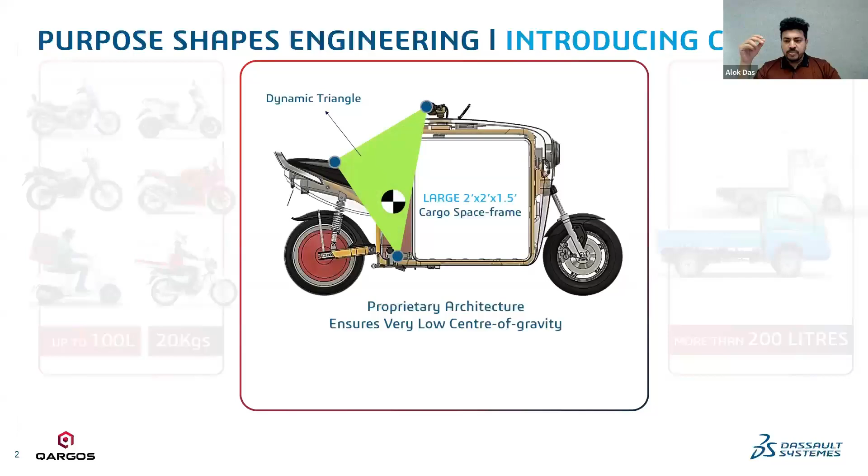At the same time, there are some commuter vehicles which are also being used for some form of logistics application. I'll not specifically talk about delivery application—delivery is just one part of it, but people use their vehicles for different forms of commercial application. They are good enough, but only for limited capacity, like 20 kgs, 100 liters of space. On the right side, we have vehicles like three-wheelers and four-wheelers.

But when we talk about a compact footprint product which can be used for multiple applications, that's exactly what we are working on—a compact logistics vehicle, a CLV which can do more for less. It's a proprietary architecture, ensuring a very low center of gravity, allowing a large space in a compact footprint. That's what we call a compact logistics vehicle, a cargo scooter platform.

We had to reimagine everything about how two-wheeler engineering has to be done with the load, so that the overall center of gravity of the vehicle is pretty low, keeping it much more stable, dynamically stable, and sorted as well. The key thing is that we have embedded 225 liters of cargo space and 120 kgs of payload, which does not include the rider.

It basically is only focused on the cargo segment. This particular journey has been amazing—there have been learnings during this process, challenges, you could also call it serendipity. We have discovered new things with this particular platform architecture that we have invented.

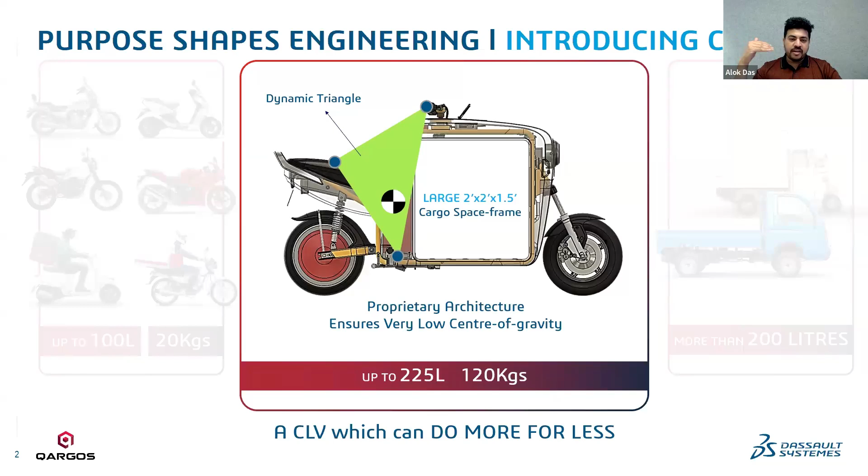So tell us a little bit more about the product, the vehicle itself. Yes, so when we started building the product, the idea was that a vehicle has to fit rightly between a two-wheeler and a three-wheeler. So we optimized, experimenting a lot about how much is good enough for a two-wheeler to carry. 225 liters of space was the most optimized volume that we discovered—it will not hamper the dynamics of the vehicle—and 120 kgs payload.

All these are physically tested and scientifically driven. It's not like a random number, 225 liters and 120 kgs of payload. It has got a low center of gravity because the cargo is actually located between the two wheels, not front loading. It has got a realistic range of 150 kilometers with the payload.

It is not a standard test condition. One key thing I must tell you is that when the vehicle is used for logistics application, it's going to go from point A to B, C, D, E, F, G, H and overall. So the utility of the vehicle, or the total cost of ownership, is driven by the number of kilometers you can do on any given day. That's how the ROI, return on investment, is going to reap.

At the same time, you cannot make a slow speed vehicle, because logistics is directly proportional to the speed of operations. If you make a low speed vehicle, it becomes a problematic thing. At the same time, these are the specs of the vehicle as well—you have to make a vehicle with 225 liters of space, 120 kgs payload, low center of gravity, 150 kilometer range, and it should be capable of going very fast.

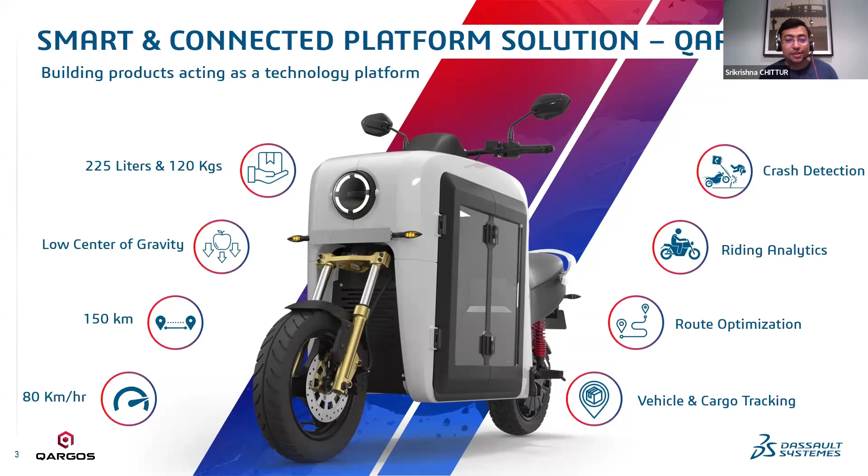And you always mention that it's not a single vehicle, it's rather a platform that is meant to do several things. Can you elaborate a little bit on the versatility of the platform?

So when we started building our solution, we built it as an empty space which can be optimized or customized for different requirements, like refrigerated compartments. This is a huge potential - about 150 liters of cold chain solution, for perishable goods like meat delivery or poultry delivery, perishable products, milk products, fish, or medicines. Those kinds of things can very well be used. This is a compact vehicle.

It's a business on wheels. A lot of small and micro enterprises might want to leverage this as a way to earn a living. It can be used for roadside assistance and parcel deliveries. So it basically goes to our imagination.

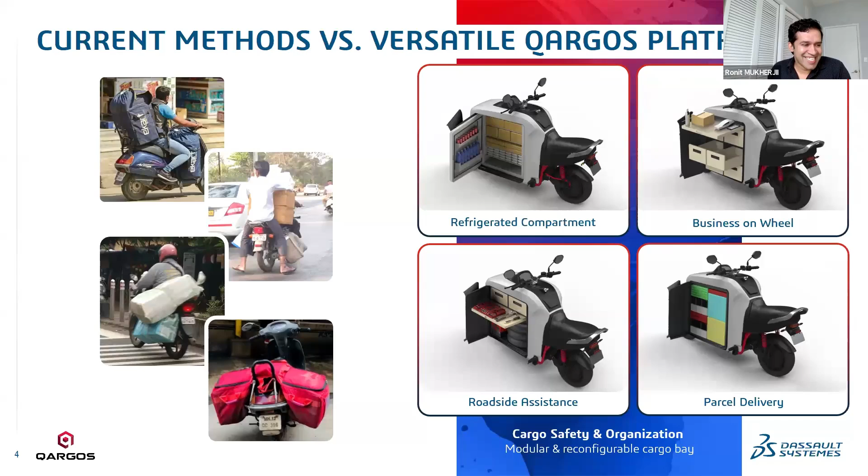It's funny we are talking about pets as a potential application. When Alok and Pranav met with Bernard Charles, the top boss of Dassault Systemes, the joke he cracked was, "This vehicle is so well designed, I would like to carry my grandkids in the cargo compartment because it also had glass, as long as it is ventilated, obviously."

And that's probably a perfect segue for us to quickly talk about the fact that the vehicle was launched at the Dassault flagship event, 3D Experience World 2024. How about that? That was awesome. On the left hand side, what you're seeing is our very own Bernard Charles exploring the vehicle. This vehicle was launched as part of a simulation domain session in Dallas.

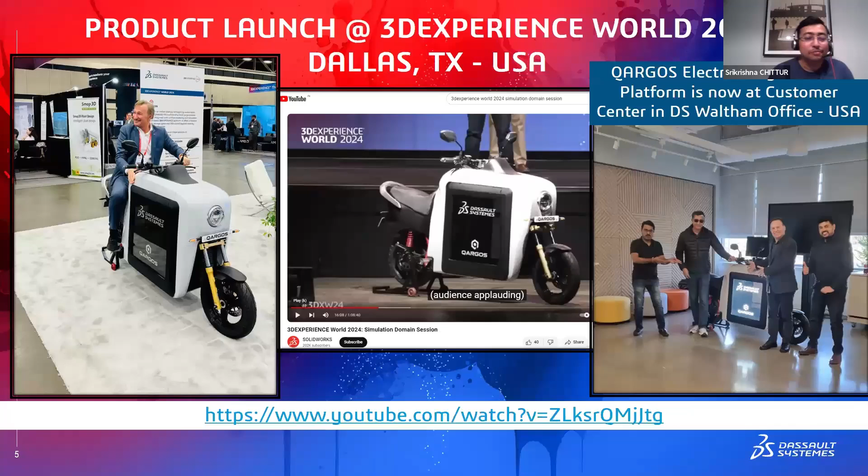It was a very exciting time because the vehicle was showcased all over. For those of you who don't know, right now this very first full version of Qargos, or first model of Qargos, is actually at our Waltham office in the customer center. On the right hand side, you see Manish and GP standing next to the vehicle, next to Alok and Pranav, who are there at the office.

Huge congratulations to you guys for being able to launch the vehicle at such a large scale, at an event like 3D Experience World. Fantastic work. Absolutely, Srikrishna and Ronit.

It has been actually a dream. A lot of times when I look at the photographs now, and I'm honestly telling about it, it looks like a dream, whether it really happened or not.

All thanks to the Dassault Systemes team. I still go back 5 years ago when we made the first sketch in SolidWorks, to this level where we have actually introduced the product at the 3D Experience World 2024. It's going to be written down in history that we did our first product announcement, and actually we came out of stealth for the first time in public domain.

So prior to that, we had been testing the vehicle for quite a long time. Very large logistics customers have been testing this. Very well-known brands across the world, which we use day in, day out, are already using the vehicle or have tested it. And this was the first time we did the public announcement.

The event itself was very electric because it's such a magnanimous event. I never felt like it was a technical conference, it felt like a rock show. All thanks to Dassault Systemes for providing us this platform to showcase our dream project and take it to the world.

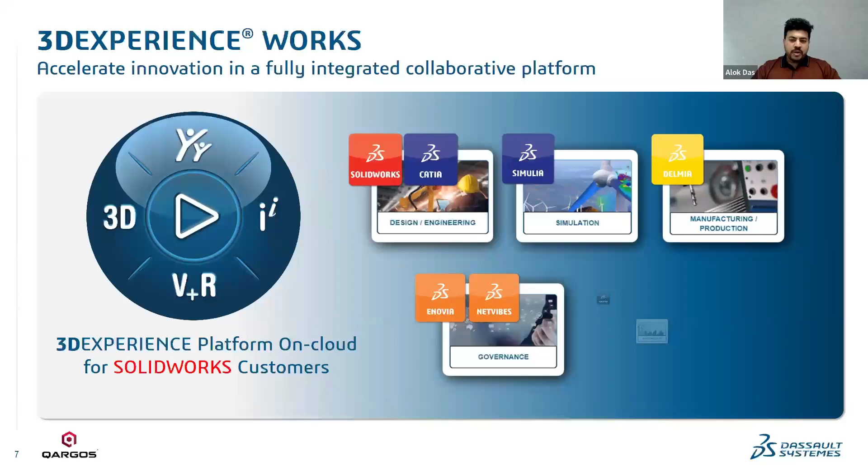Sure, two specific reasons I would like to talk about. In my previous organization, one of the things that was imbibed deeper into our minds and overall daily culture was the analysis first approach. I have been brought up as a professional, as an engineer, as a manager, as a contributor, with that analysis first approach. In my previous organization, we definitely saw engineers face challenges with integration of software, or the seamless movement of design between simulation software and design software. So when we started understanding more about 3D Experience Works, one of the beautiful parts was that it has been well thought of from the point of view of seamless interoperability between different tools and platforms which have been well integrated.

Now, as a startup, when you are running with very limited resources, one of the things that becomes important is the amount of time and effort required to learn a set of things and get it done. For a large corporation, it's very easy, you can always deploy more resources, hire more people who can handle different sets of things. But when you're part of a startup, the focus is not only on handling the software, the focus is on output, because for the customer, the speed of operations, or the speed at which you operate, is one of the most important elements of being a startup.

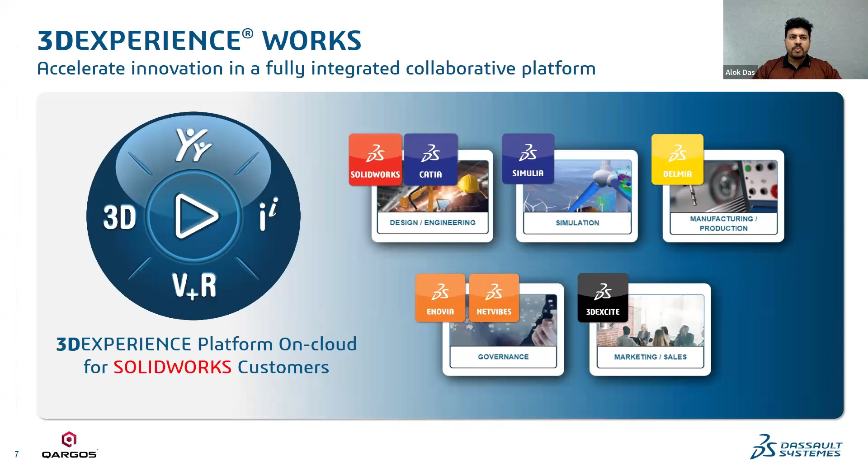The key thing when we started learning more about 3D Experience Works is the seamless integration. Overall, the cloud and multi-physics approach is very much possible. The idea is that a user should not be spending more time learning a software—he should be spending more time building the product. That's the multidisciplinary approach, with the latest version of the software always available to you.

It's available the moment it's on the cloud, so you get the most latest features available. All those things put together gave us the power to harness modeling and simulation on an integrated platform. Now that's what we call a ModSim approach.

No, this is fantastic, great. I'm actually very curious to know from our viewers—how many of you watching the webinar right now actually use simulation right now? Let's do this, let's launch a poll.

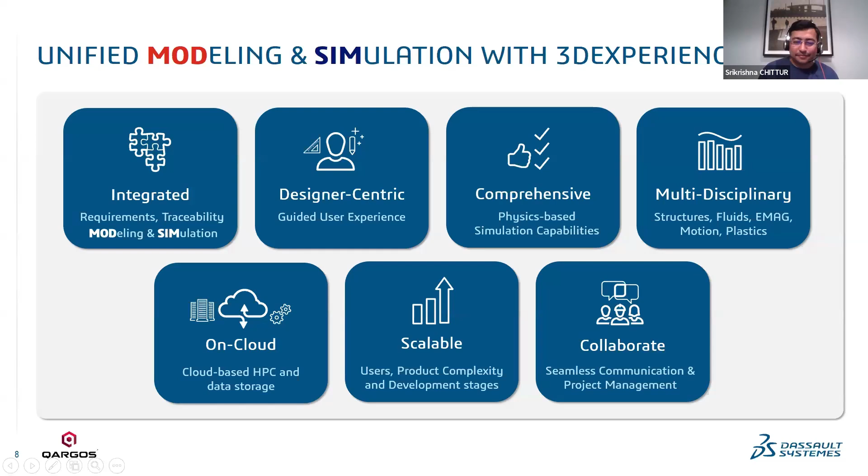That's great insight—there's still some outsourcing simulations and doing hand calculations like we used to do back in the day. We might need to have a conversation with them. Cheers, thank you for that, and thank you for running that poll and answering those questions, we appreciate it.

So let's talk about when we started doing the QFD, the quality function deployment. We started understanding what the customer requirements and needs are. For example, the vehicle is going to be out on the road for many hours every day, so it has to be safe, reliable, and durable.

Rider comfort and maneuverability become very important, because you're going to have about 100 kgs, or 200 pounds, of load inside the cargo bay. So maneuverability and rider comfort matter—he should feel very easy to ride it even with a heavy load. Performance and range are important because you want things done faster. Large and modular space, and total cost of ownership matter too, because at the end of the day it's a business that has to recover the return on investment.

So on the left side, what we see are the key spec requirements, which were basically translated from the customer's wants and needs.

How does it translate into the overall requirements on the right hand side? Let's look at it. When you want a safe and reliable solution, you're talking about a stronger chassis which doesn't break down, and it has to be out on road every day for several hours a day. It has to have lower aerodynamic drag because you're trying to make a fast vehicle, a more integrated vehicle, so aerodynamic efficiency becomes very important.

Safer batteries, it should not catch fire, because if it catches fire the cargo is also getting burnt. At the same time, the overall manufacturability of the parts, injection molding simulations, which allow you to do it right the first time, the analysis-first approach, connected vehicle platform, electromagnetics, or the smoother ride. So all these on the left side translated over to some of the key technical requirements for the vehicle.

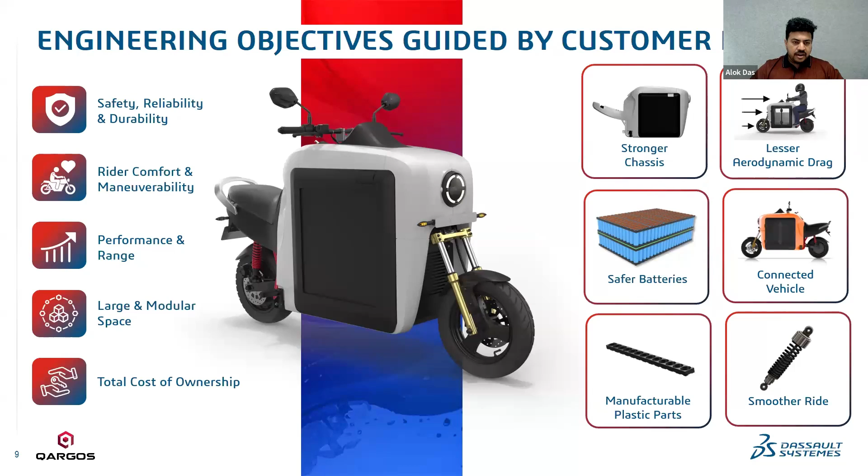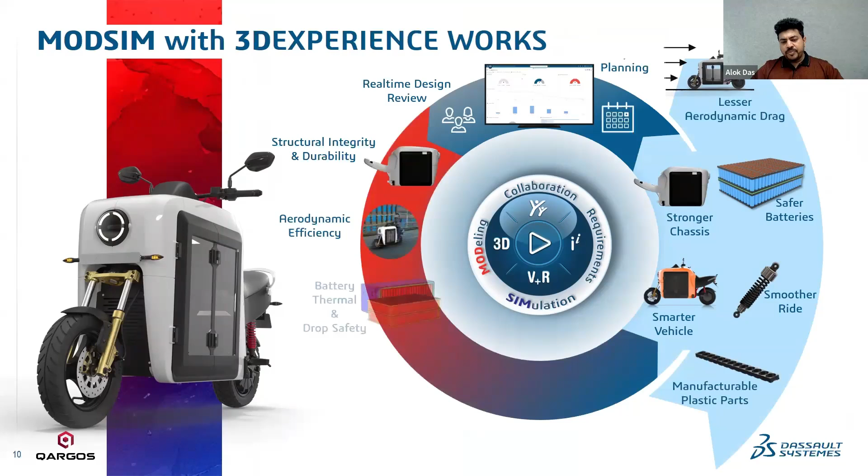By leveraging 3D experience works, what really allowed us - we'll be talking about that in detail - the idea was that the integrated environment allowed us to get a lot of these things done at the design phase in a much more optimized and seamless fashion.

Whether it be real-time design review, where we need not be present in office and can do that remotely, or the structural integrity and durability analysis done in Abaqus, which can be seamlessly transported between SOLIDWORKS and Abaqus very easily, or the aerodynamic efficiency and drag, or the injection molding - a lot of these studies and the overall design has all been very much possible to get done faster with the help of 3D experience works.

I must also tell you, when you talk about large organizations like Honda or Yamaha, they would have hundreds of people doing all of these activities. But when it comes to a startup with a limited set of people, the overall execution has to be very intense. And that's where the software plays an important role in minimizing cost and getting it done much faster.

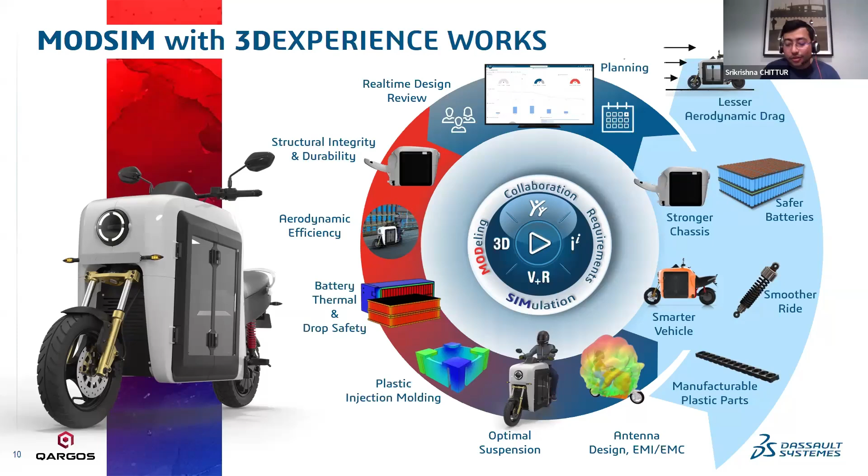Yeah, absolutely. And in fact, Alok and Pranav, to your credit, you guys have truly democratized simulation. Based on what we have seen, your designers working on different subsystems are using different kinds of simulation in parallel with SolidWorks. Your heart of modeling is obviously the SolidWorks technology, but you guys have deployed various kinds of simulation workflows for designers. So now is probably a good time to switch gears and hear from Pranav about one of the major applications and the methodology developed during last year in terms of aerodynamic and drag prediction.

So Pranav, can you elaborate a little bit about why this is important, especially for this class of vehicle, and how did you guys go about addressing the challenges?

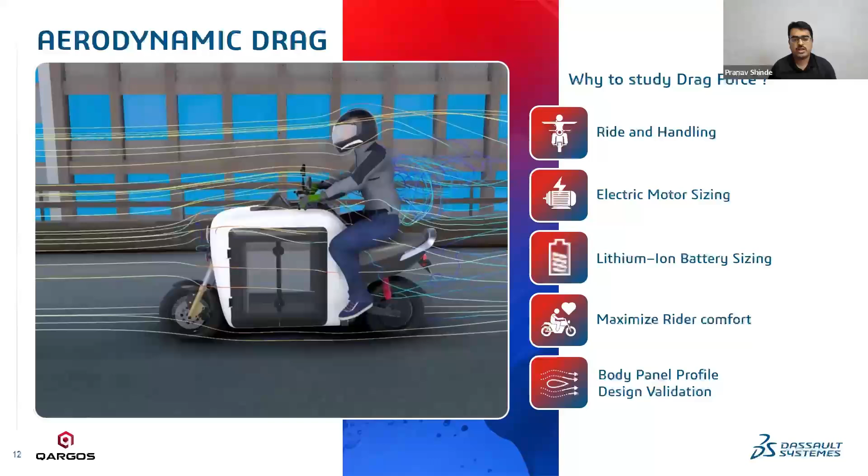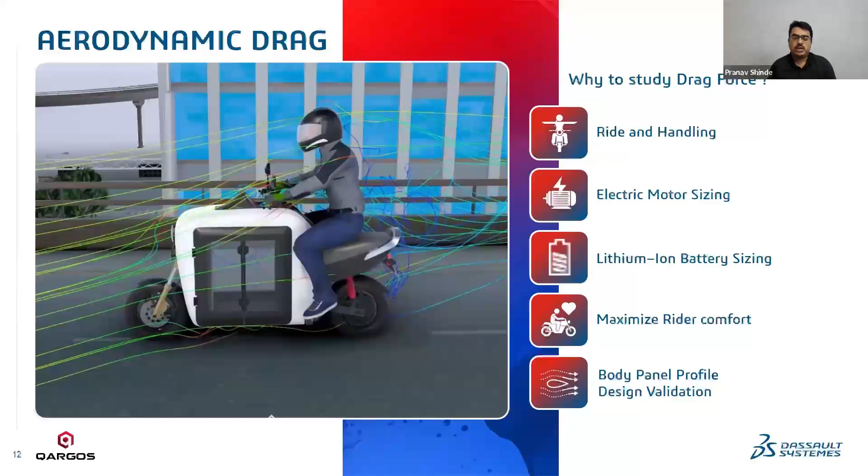Yes. So as Alok has already mentioned, when this particular platform was built, we essentially didn't have any benchmark kind of thing. So it was very difficult to understand how this new platform, this particular form factor, would be affecting the ride and handling, and what kind of motor sizing has to be used for this particular vehicle, because it can carry loads from 0 kgs up to as high as 150 kgs. And you could have multiple load carrying scenarios, multiple applications, and to design one particular motor, one size of battery pack which can cater to multiple applications is a little difficult.

So we had to narrow down to our requirements and understand what are the best ways to design and fix the sizing of the components.

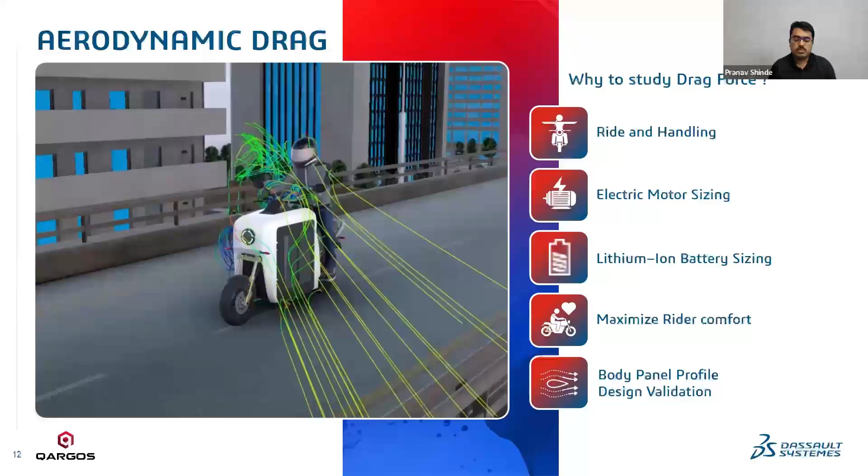Similarly, when it comes to the body panel profile, there was a trade-off between how low the drag force has to be and how aesthetic the vehicle should look, while also being functional. You need doors to open the cargo, and you need accessibility for entry and exit.

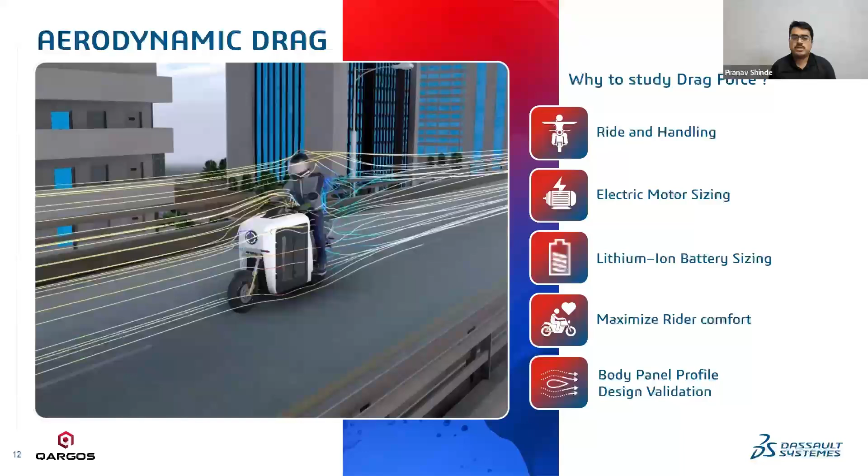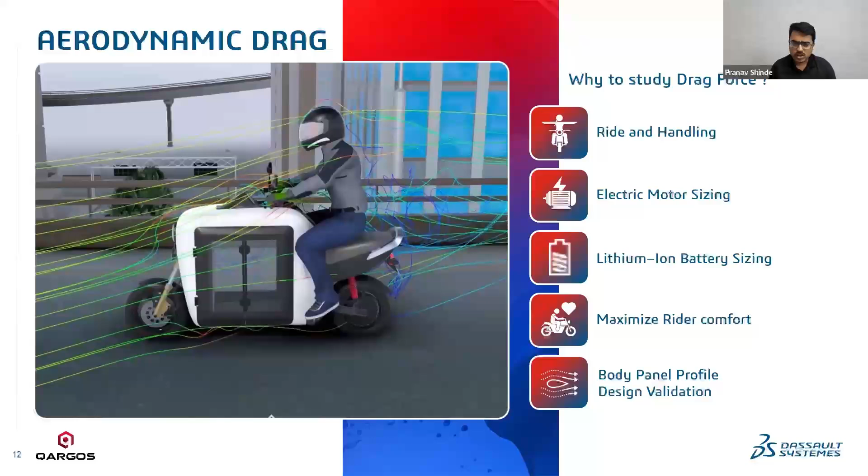This brought us a curiosity to do a full-scale simulation of the vehicle. It would give us a lot of inputs on drag coefficients and how air is flowing across the body panels and across the rider, so we can design or redesign the body panels as per the requirements. So then we thought of going to the simulation approach.

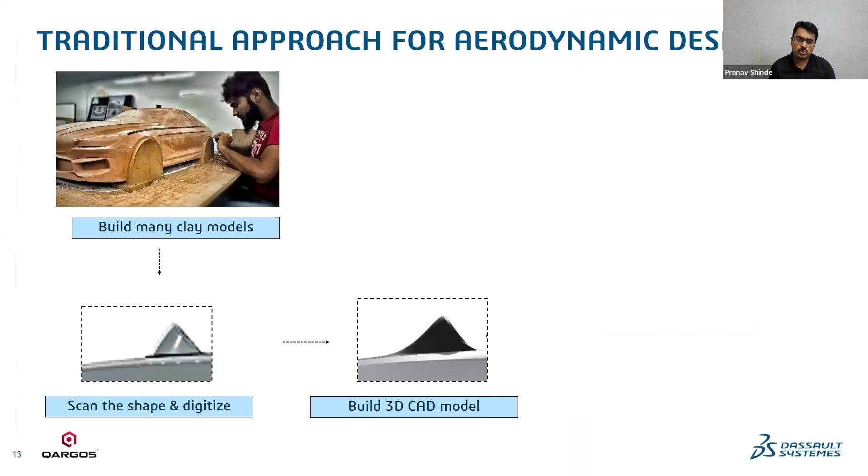Traditionally, if we had to do that, it would have been a very lengthy process. Basically, we do a clay model of it, then try to 3D scan it, digitize it, and build a 3D CAD model of it. This itself is a very lengthy process.

Then we do simulations on it, and once we are happy with the simulations, we go to the wind tunnel test to understand how the design is going to affect the performance. If at that point we understood something is wrong, not as per the design intent, we'd again have to change the design, redo the clay modeling, and repeat the entire process. This takes a huge amount of time, and a lot of cost is involved.

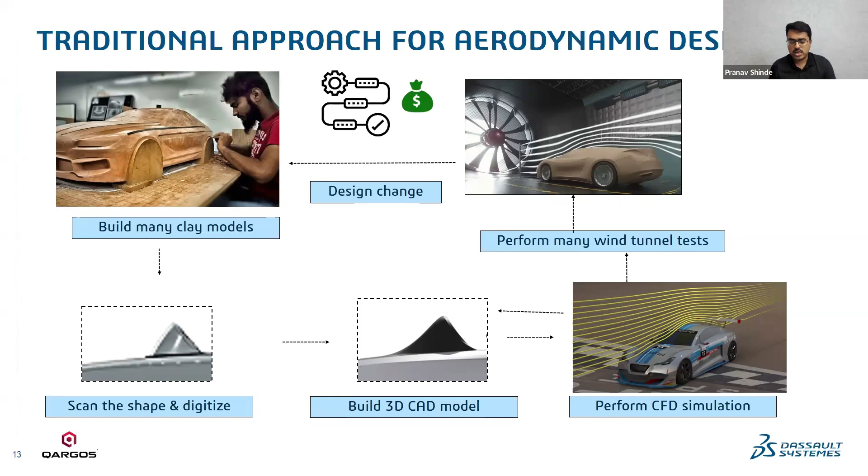So then we thought of going to the approach of what we call a digital twin. You basically build the 3D SolidWorks CAD model, and you directly push it by one click to the platform. There you do a lot of simulations, assessing the body and the airflow across your model.

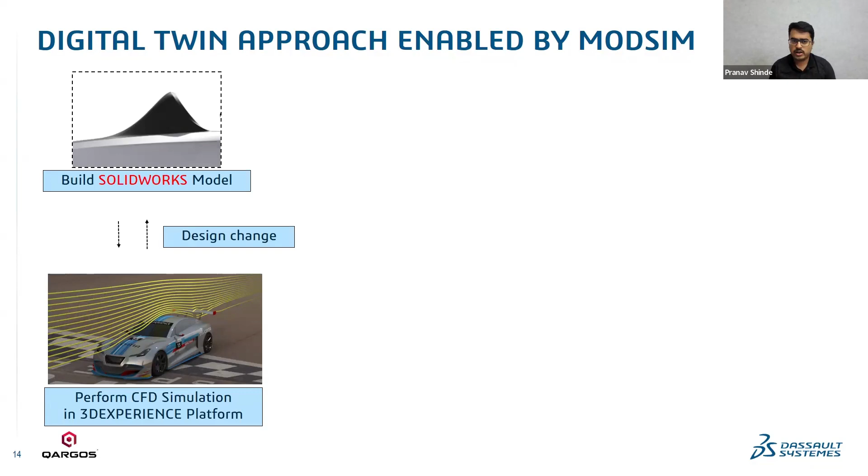And if you feel that somewhere the flow is not uniform, there's a lot of turbulence created, or the air is not flowing as intended, you go and make the change and come back to simulations right away. This shortens the CAD modeling and simulation aspect.

Once you build it, you can make a single clay model and put it into wind tunnel testing. So with this process, it's not required to build multiple clay models. You just do all your iterations in the digital twin, then build one clay model, test it, and validate your research. This is the same platform where we build the entire SOP to do the simulations, which we'll see in the next slides. This helps accelerate the product development lifecycle in a super fast way.

No, this is great, Pranav. I saw the image of the gentleman making the clay model of the car. Given my creative abilities, that would take me all my life—I cannot do that. But being able to do that internally into SolidWorks so smoothly, it's much better.

Not even that—back in the day I was looking for some wind tunnel testing to be done on a motorcycle, just a personal project, and getting quotations of how much it costs to do wind tunnel testing. Oh boy, that personal project just remained a personal project—it was really expensive, so...

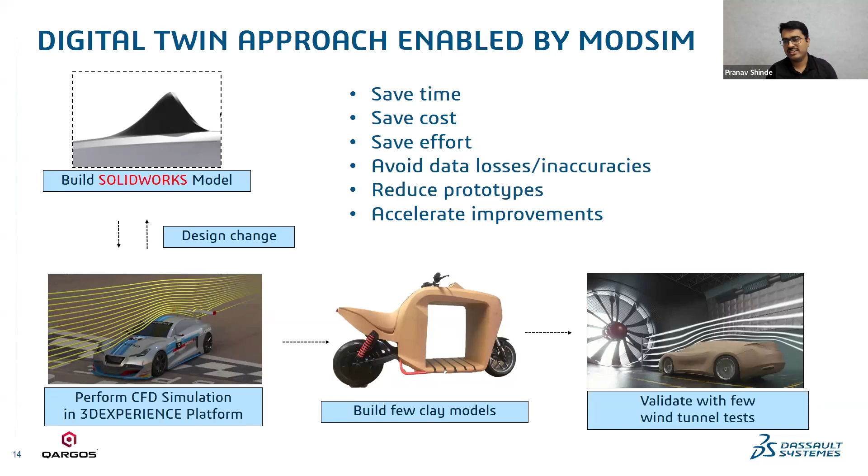So this is great—I mean, even getting access is difficult, forget about the cost, that's secondary. Access is very difficult indeed. It's not just about putting something in a tunnel—there's also a lot of pre-processing work that goes into the picture.

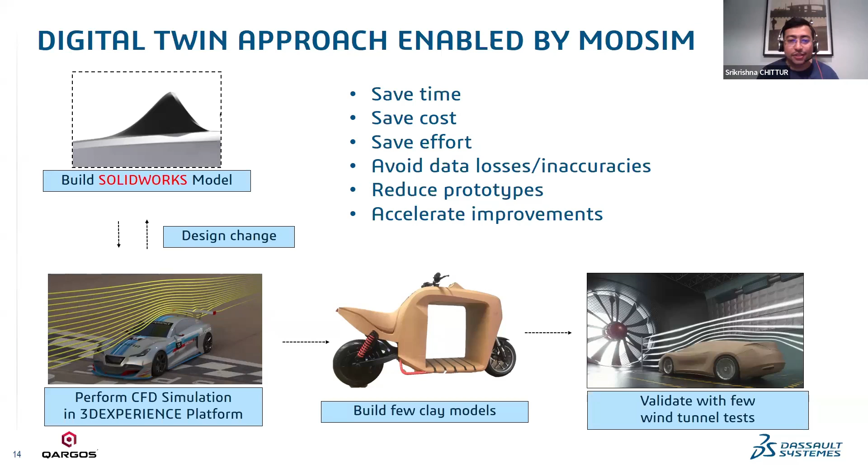Correct, and even building the clay model is expensive—there's a specific kind of clay used for these models, and that clay is very expensive. When you build something for a wind tunnel, there's instrumentation involved, and it's very cost and time intensive. What Pranav described is the perfect usage of simulation—not necessarily to replace physical tests, but to reduce the number of physical tests in order to get it right the first time and release the product faster to market. Getting it right the first time is what we should focus on to reduce costs and improve the design process.

So in this particular slide, we can see this is a typical MODSIM approach for drag prediction.

So basically, we develop the CAD model in SolidWorks, then we push it to the fluid model, then we build the scenario across it. In scenario, we decide what kind of air medium it has to pass through and all those things. We then give the mesh definition to it, which we'll see in later slides. Then we do the cloud compute, and at the sixth step, we generally see the results. One interesting feature here is if you feel the results are not as per your design intent, you can go back to step one, make a change, and come directly back to cloud compute.

It will automatically calculate the new simulation results. You don't need to repeat steps two, three, and four again. So this saves a lot of manual time for designers, right? Exactly.

Is there a need for data exports or imports, or is it just a simple save and push? I mean, no, not at all. Meaning in the previous, last time when I used this, 5-6 years back, there was a lot of issues that used to happen when you transport the CAD model to the simulation software. It used to always throw some error that there is a line missing, a surface stitch issue, and all those things. But in this case, since the platform is integrated so tightly and neatly, it takes care of all these issues.

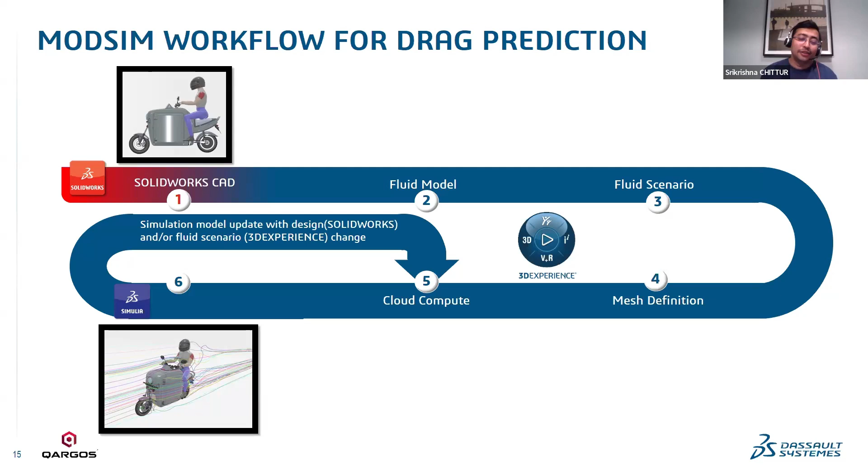That stage is very troublesome for all CAD engineers and simulation engineers. That's great to hear. In fact, in the world of CFD, about 60 to 70% of the manual time is spent on just cleaning the model, getting it ready for simulation. So you bring up a very good point.

Tell us about one of the key things done on the SolidWorks side to extract the frontal area. So just a couple of days back, I was talking to one of the motor suppliers, the hub motor supplier, and he asked me what is the cross section surface area. I quickly went to our presentations and the paper we are publishing, and gave him the value immediately. This would have been very difficult to calculate in a physical scenario.

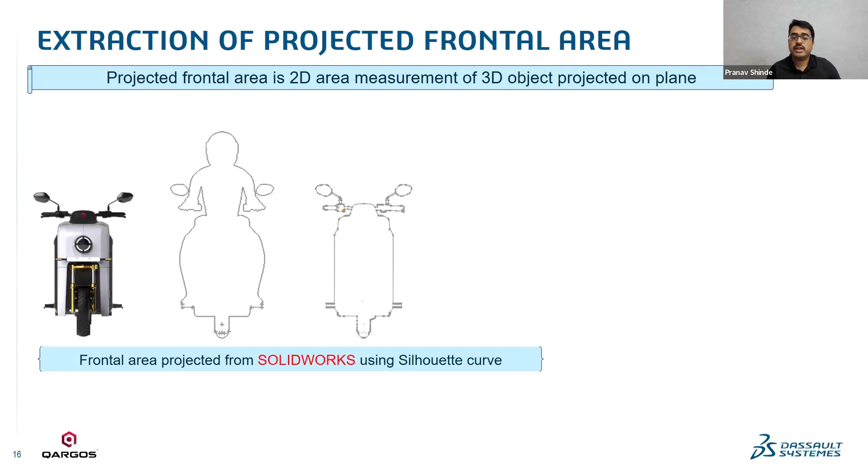But in the SolidWorks platform, you get a silhouette curve entity selection tool wherein you can project all the entities onto one single plane. Once you stitch this together, you get the surface area projected at that particular plane. This is helpful in understanding how much drag force is going to act, and it will also calculate the coefficient of drag.

For example, you can see here with the rider, the surface area is somewhere around 0.83 meters square, and without the rider, it is 0.53. This gives a good understanding of how much drag is caused by the vehicle alone and also the rider. We can see it in the upcoming result simulation. But one particular aspect here is that the more the frontal area is, the more the drag is going to be. That's the kind of intent we tend to have from this particular slide.

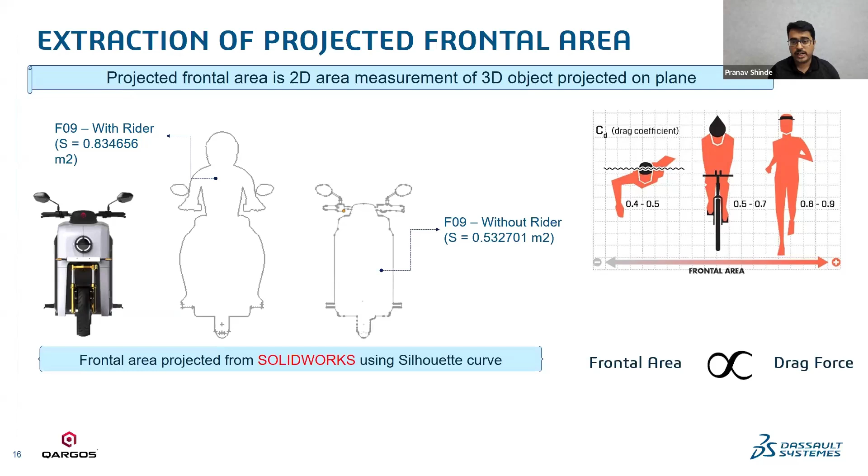Then we give particular boundary conditions. For example, the walls are slip boundary conditions here, because if it's a no-slip boundary condition, you will get very bad results, since it will assume your vehicle is running in between only those particular walls. But in real life conditions, you have atmosphere all over. So you have to be very cautious about giving the boundary conditions for the walls selected. This virtual wind tunnel model is intended to simulate more of a real world condition. Yes, exactly.

Eventually you're going to have a virtual wind tunnel model that replicates the actual physical wind tunnel.

Yes, exactly. That reminds me of when I was new to simulation, my mentors were very keen on emphasizing that when you're setting up the simulation, it has to be very close to what the real world scenario is. The sentence that came out was garbage in, garbage out. So we want to make sure that the stuff going in is actually replicated in the real world, to be able to get the proper answers.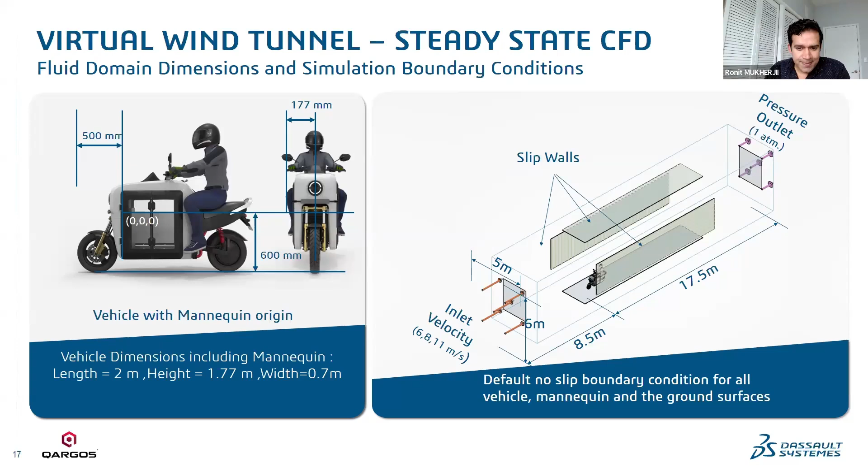Just connecting to the previous slide, you can see a vehicle in the front, in zone one. This is the length that we have decided for the wind tunnel. Now, suppose if you shorten the length of this wind tunnel, you're not going to get the desired results.

That's particularly because there has to be multiple elements of zoning done for the meshing. Currently there are almost 9 zones, starting from zone 1, zone 2, and going to zone 9. You can also see there is a difference in the mesh size and element size.

This particularly is the volumetric refinement zones within the virtual wind tunnel, in order to capture the wake, which has a direct impact on the drag calculation of the vehicle.

So the solution has to get converged by the time it exits from the last plane on the right side. If you shorten the tunnel length, you're not going to get the same pressure as it was at the entry. Since when you're driving on the road, the pressure is atmospheric all over, but if you truncate the tunnel, your exit pressure is not going to be the same, and therefore the inlet is not going to match the outlet pressure, giving very different results on your CAD model. So it's essential to ensure that the flow passing through the vehicle goes down and normalizes with the atmospheric conditions.

We see that there were a lot of mesh independence studies done to ensure you have the most optimal mesh that is producing the right results, with results not changing. But we also notice that the mesh sizes are pretty crazy, around 50 million elements, and that's quite typical for aerodynamic simulations, not just this vehicle. I guess cloud compute helps in scenarios like this.

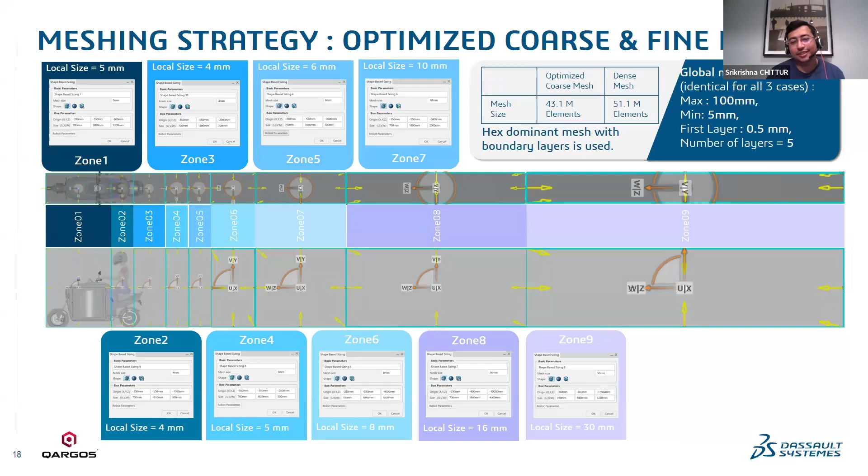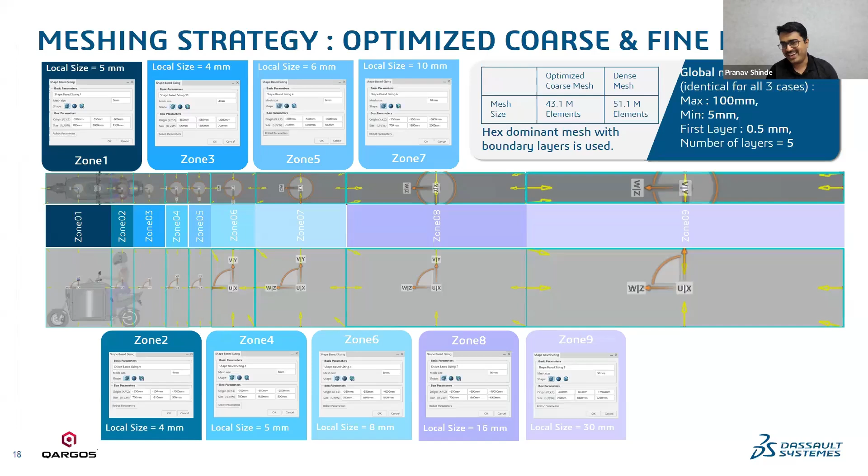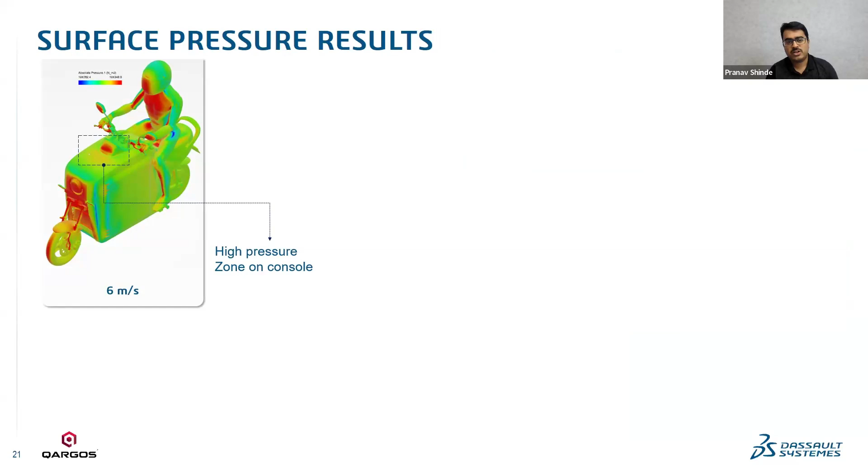Let's talk about the results. These are the pressure plots at different velocities—6 meters per second, 8 meters per second, and 11 meters per second. At different speeds we tried this. One can see here that we get three typical high pressure zones: one on the rider, one on the front console area, and the frontal area where the headlamp and suspension mount is.

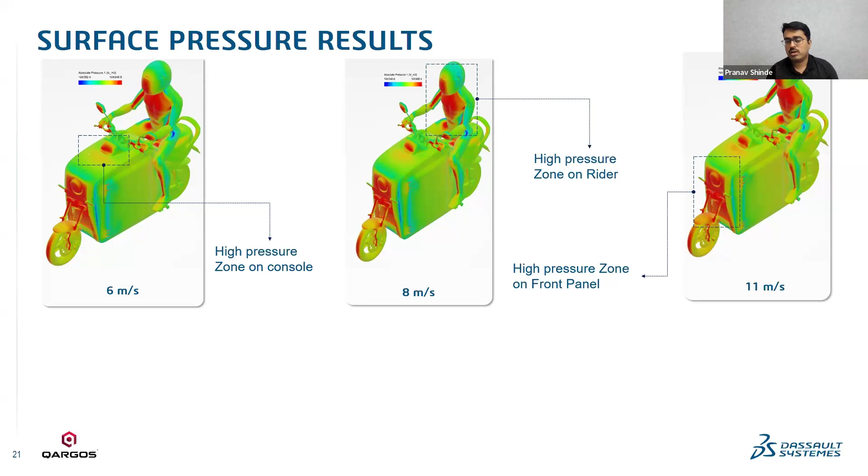Now, if we tried to do this in the real world scenario, we could understand that the vehicle is having higher drag force, but it would be very difficult to understand which part is contributing how much. We could only guess on a hunch that the front wheel is contributing this much and that is contributing that much. But with these simulations, we can get the exact contribution of each individual component mounted on the vehicle, giving us freedom to quickly decide what part has to be changed.

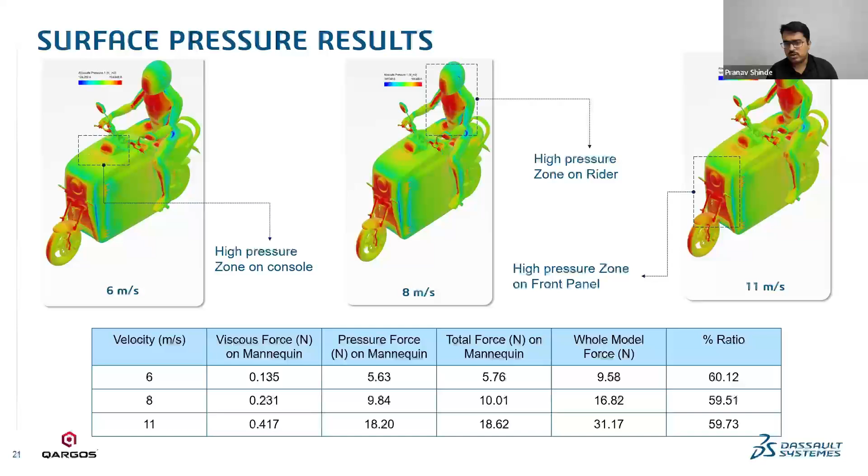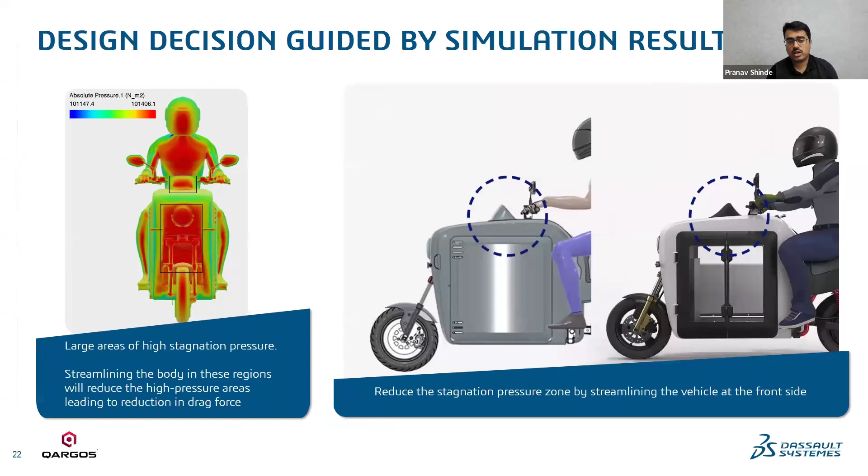Which can bring down the drag. That's what we did in the next slide. We especially thought about changing the pressure on the console, where it was a very minor change, and the change was done very quickly, immediately.

This change brought down the stagnation pressure zones and improved the drag forces. The decision was taken very quickly because of simulations, or else it would have been very complicated for us to think about what part to change. Intuitively we might not understand that this is going to affect much, right? Looking at the part, there's not much change as such, it's just a sharp fin to a slope kind of thing.

We could have thought about changing some different part, but that's a very good point, because in structural simulations you can kind of guess where this part could break, depending on where the loads are applied and where the constraints are. With fluid or electromagnetic simulations, the results you get are typically somewhat non-intuitive, unless day in and day out this is all you're doing, which is a different story.

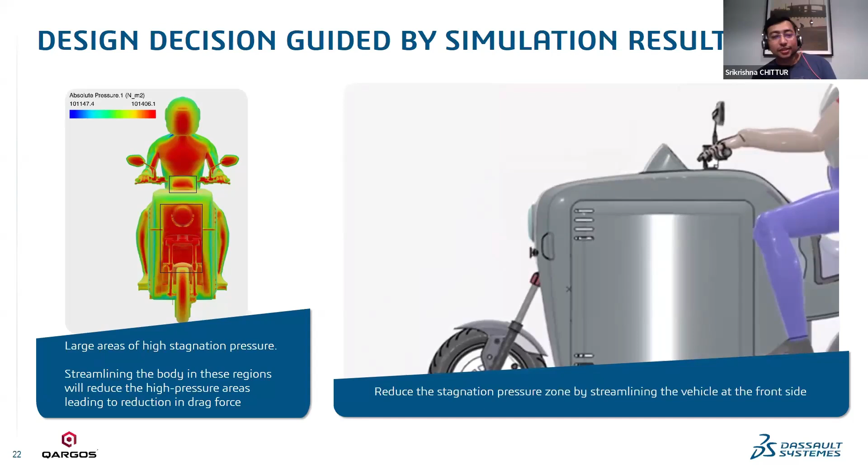What you're trying to do is adopt or build a new aerodynamics workflow for a new generation of vehicle. So what you're saying is this was the least aggressive change you could adopt quickly to get an improvement in the drag reduction.

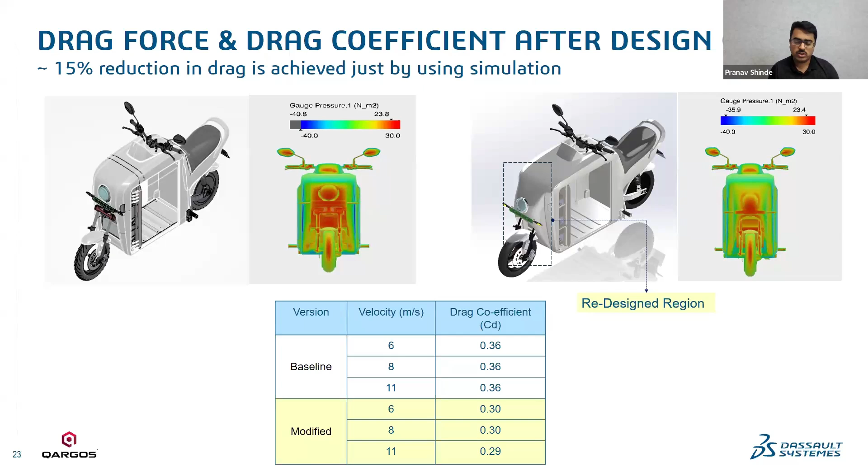What about the frontal portion? Yes, this was obviously the most contributing factor in the drag forces. But when we tried to do the design, it turned out that it's going to be a costly thing to change this particular design or implement this change, because it affected many other child components.

Secondly, from an industrial design point of view, there were some negative feedbacks. So we thought, let's park this, let us again try to redesign the front section, taking into care the industrial design and other component packaging in that particular area. This is still in progress, but we are going to do it in phase 2 of this project, where we try to simulate multiple different designs on the front panel and try to reduce the drag at the front.

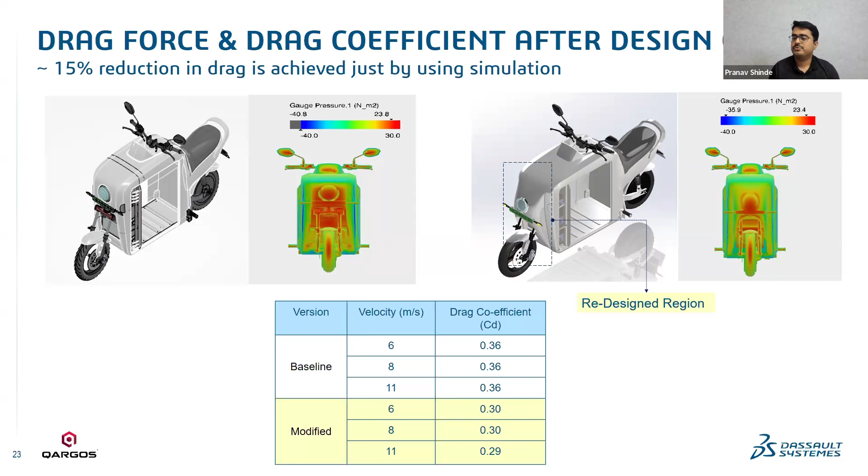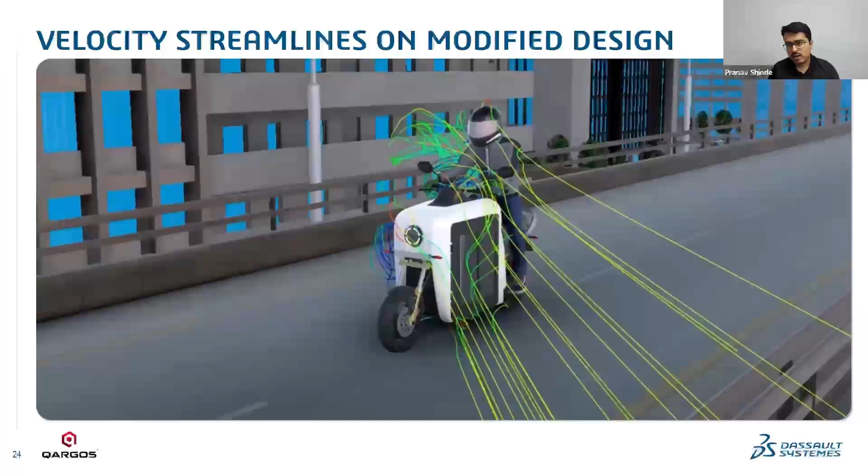This is a very beautiful slide which shows the streamlines coming from the front side, and at an angle, and this exactly shows where the negative pressure is. Just behind the rider, you can see blue contour lines which show the negative pressure, and some higher red color lines which show the higher pressure zone. This kind of gives a second thought, or a second hand to your intuition, on how the air streamlines are passing through.

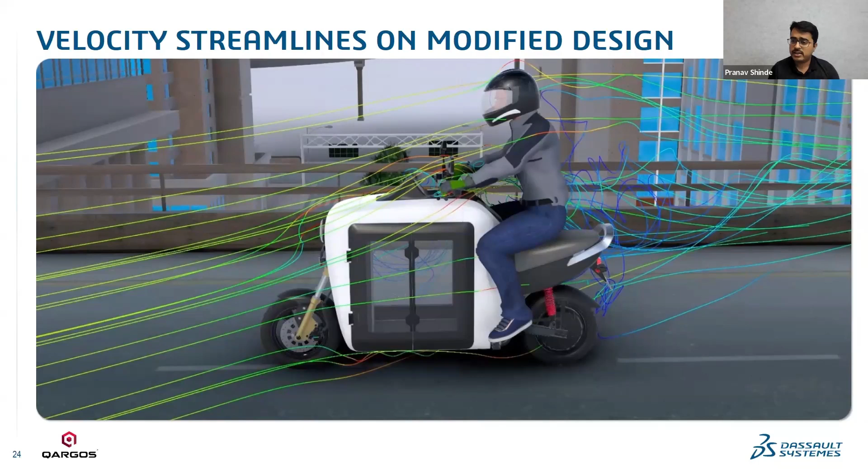The streamlines do help a lot in understanding how the body should be contoured, how the industrial design has to take place. We can share this with our industrial designer guys, and they can then design the body panel around it. So it's also helpful for those guys to design the vehicle.

And you've also used this methodology, or developed methodology, for crosswind aerodynamics, right? So we did it for crosswind because the crosswind is very important in terms that the vehicle can be impacted by crosswind because of its form factor.

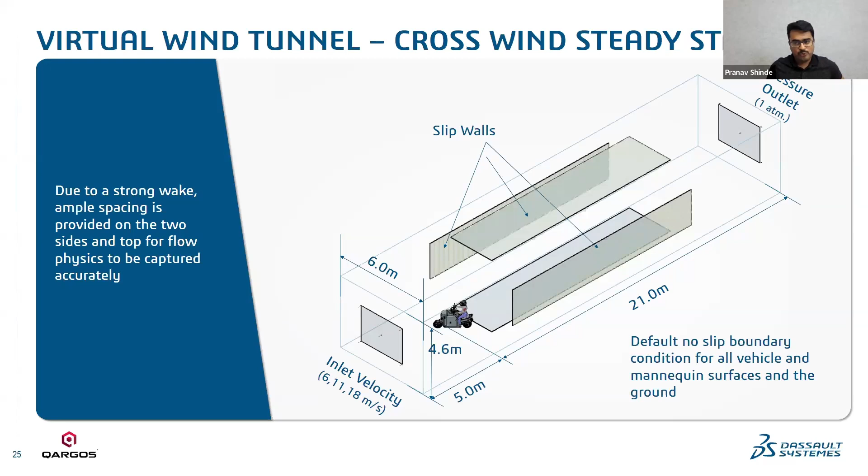Second, we can have a lot of gusts of wind coming from multiple angles when there's a windy day. A truck passing by can impact the forces acting on the vehicle. So it was very important to study the crosswind, also given the fact that the vehicle is a high-speed vehicle, not a low-speed vehicle.

So we have to study the crosswind very carefully. In fact, we are still studying it at a much deeper level to understand whether there are many more effects. Here you can see we have only studied 15, 30, and 45-degree angles. We are in fact thinking of studying the 90-degree angle, a complete horizontal wind force coming onto the vehicle.

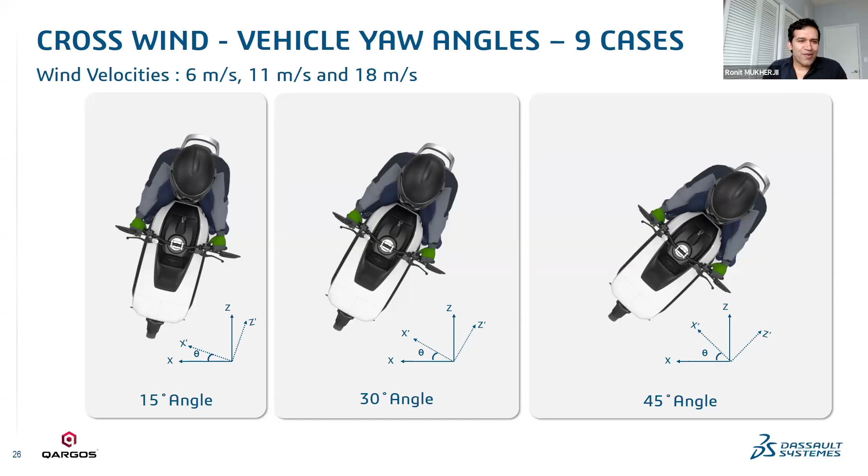I guess studying these multiple configurations is very easy for you because your modeling and simulation are connected to each other. Exactly, you change the angle in SOLIDWORKS and then update the simulation model on the platform, or vice versa. I mean, you push to cloud and you forget it. You come back after a day or two and you have the results at your hand. I love that you push to the cloud and you forget it, that should be it.

No, this is fantastic stuff, Pranav. I'm really excited about how you guys make design changes and how it improves your products. But it also has to speak volumes of how it has a trickle-down effect.

So for example, that shark fin design, if it's a plastic component you're working with, and you have to make a design change, and you already have a mold made, then you have to make mold changes as well. But in this case, you don't have a mold yet, so you can make whatever design changes without affecting a mold. So when you run your plastics analysis and make your first prototype, voila, you're good to go. That's impressive, man. Really impressive. Well done.

So let's talk about some of the key takeaways from the aerodynamics work so far. We did this virtual wind tunnel, and today we have a fully developed, established procedure for doing the simulations, and we are trying to do multiple simulations still.

There are a couple of things we need to take care of in this vehicle: the crosswind at higher angles, and second, the battery cooling which comes from the front. So we are doing that with the established procedure we already have—that's the next activity. But in this particular simulation, we did achieve a reduced drag force of 15%.

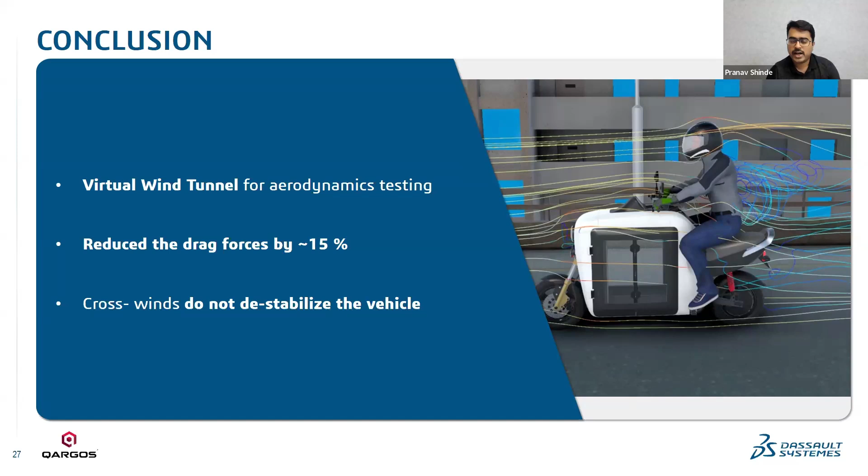One important understanding we got is that the crosswinds are not destabilizing the vehicle—we always had the fear that this could happen with this particular vehicle. But at the speeds we've designed this for, it's very much stable.

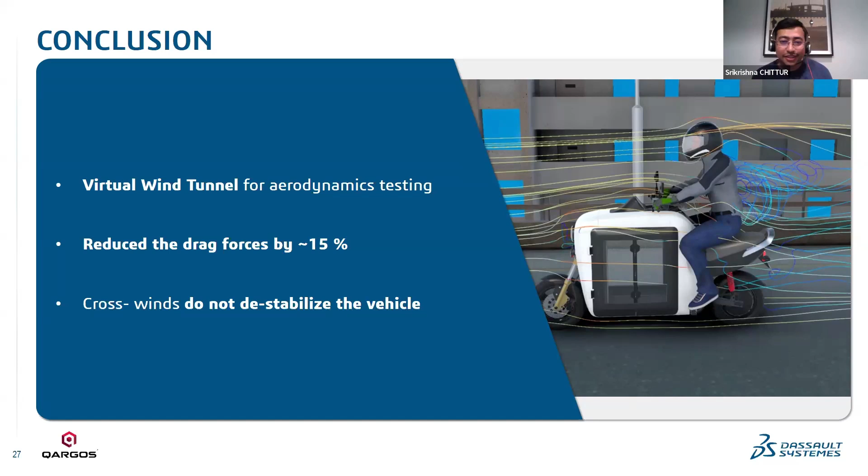I think one of the nice things is, instead of putting a scaled model in a wind tunnel in a controlled environment, you're actually doing the simulation work on a full scale model, and grabbing physical data by putting sensors on the actual vehicle in real world driving conditions. That's awesome. This is fantastic, man. Great stuff.

So my next question—you mentioned battery a couple of times, and this is an electric vehicle, so battery is the first thing that comes to an engineer's mind. I'm sure you guys put a lot of effort into this battery design. Can you give our viewers more insight on the problem statements you ran into while designing this battery, and how you overcame them using the tools we have? Right, I know the battery is a troublesome thing for all electric vehicle engineers.

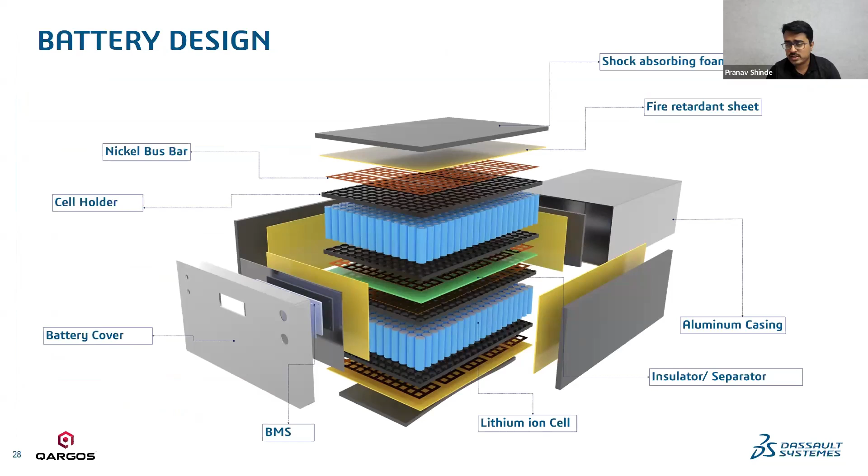It's essentially the powertrain of the vehicle, which has to be designed properly. As you saw with the multiple components in the battery pack, you have to take care of thermal runaway, the thermal pads, the gels used, the cells and how they've been integrated, the nickel bus bars, and the BMS. All these factors affect things in different ways—we'll see that in the upcoming slides.

Before that, let's talk about how and why these thermal simulations are required. Just assume this particular duty cycle: you're driving a bike on the highway, and it's generally a cruising kind of duty cycle—you throttle it, and the speed variation isn't that high, not like 0 kmph to 40 kmph and back to 20 kmph. So it's a cruising cycle.

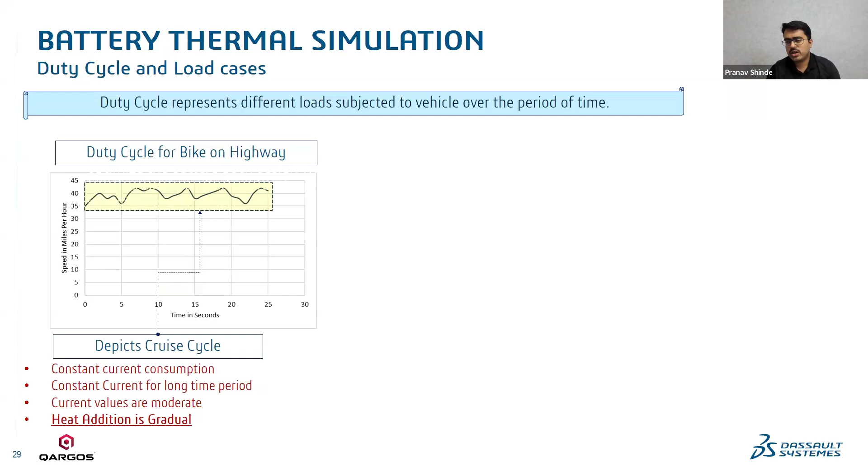In this case, your current consumption is fairly constant and on the lower side, and the heat addition is therefore very gradual—it adds over minutes and hours of time.

But the reverse happens in traffic. There you have to brake and accelerate depending on traffic and road conditions. When you bring the vehicle to zero speed, you have to again attain a higher speed, and that's where you need higher torque. Higher torque means higher current, and higher current means higher heat—that's the instantaneous heat we're talking about. So the heat addition becomes very sudden in traffic kind of duty cycles.

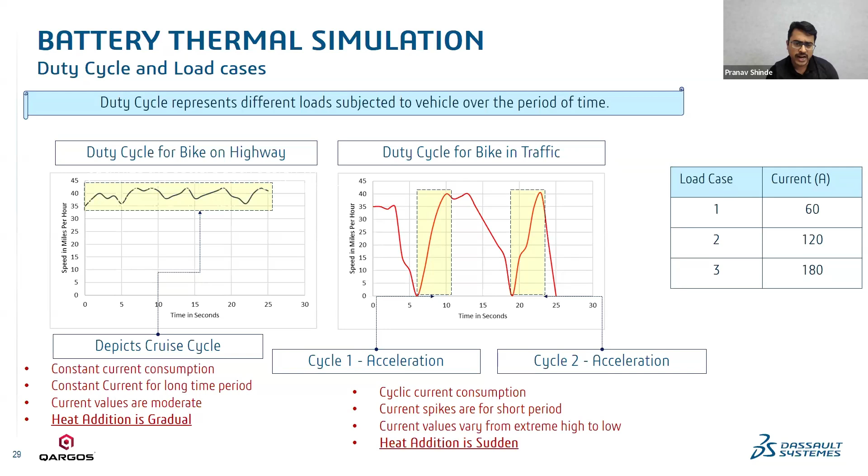This is the duty cycle for our particular vehicle driven on Indian road conditions, and from there we narrowed down to three particular load cases of different current consumptions, which is what we finally solved for.

This is kind of similar to what we did for aerodynamics. Ideally both are in the FMK solver, so the flow remains pretty much the same. You build a CAD model in SolidWorks, save it onto your cloud, and develop a fluid model around it. You design the scenario, what kind of liquid you are immersed cooling in, if it's air cooled or liquid cooled. You define the mesh.

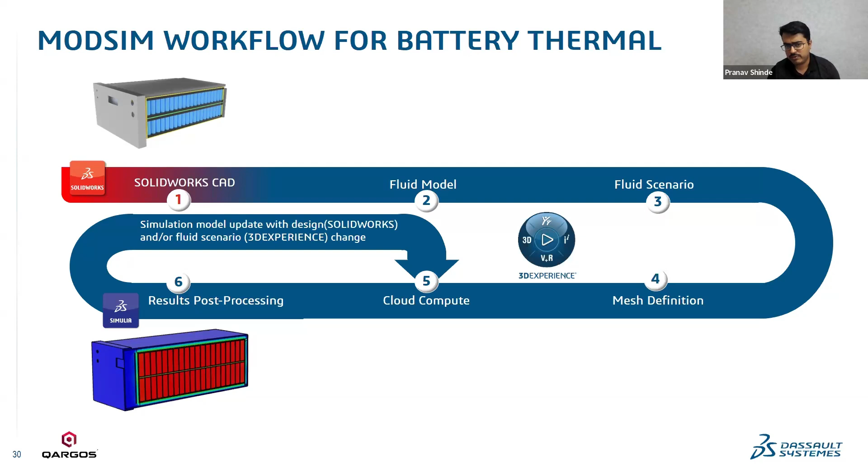In this case, the mesh is much more complicated. Then you do a cloud compute of it, and when you see the results and post process it, if you find there is some thermal temperature drop or it's increasing in some areas, you go back and change, for example, the thickness of the insulating material. You bring it down from say 10 mm to 5 mm. Then there's no need to again do all the modeling and meshing. You just come back to cloud compute, mesh it, your mesh adapts to your design change, and you get the results. So that's very simple kind of stuff.

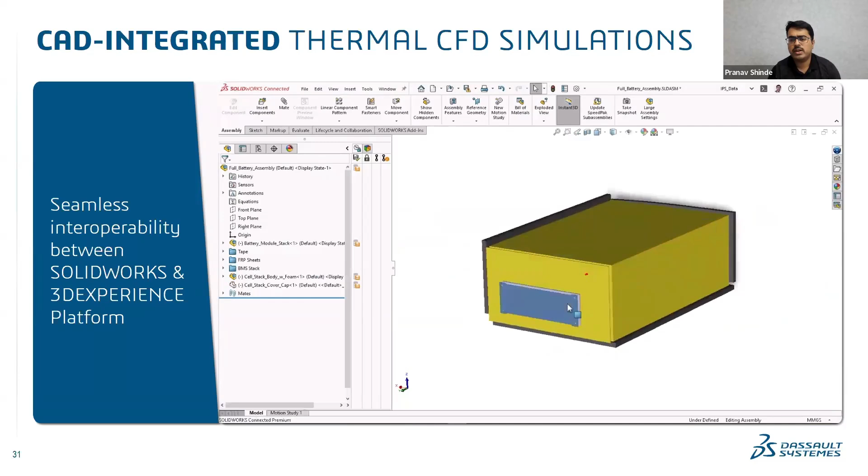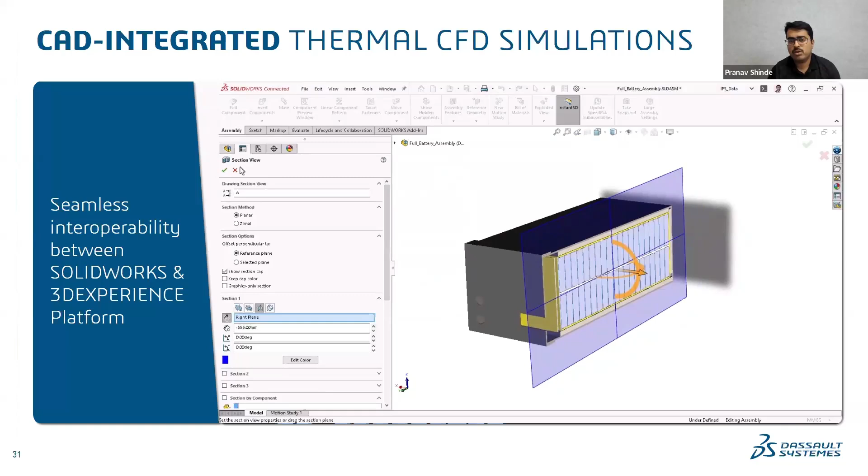Here is a small demo for SolidWorks users, how you can put the battery pack and save it on the cloud. There are multiple parts of the battery pack, starting with the FRP sheets, which help in fire retarding. Then you have the blue color cells, and the cell holders. You can see in the cross section there are two stacks, one above and one below. Then you push it to the 3D platform from here. You just save it, and then open it in the simulation model to do the simulations.

And how many cells do these packs typically contain, Pranav? This can contain, so we have multiple variants, starting from say 260 cells to 340 cells. It can go even as high as 540 cells if your form factor is less. For example, if you are using 18650 cells as compared to 21700, you have to use many more cells.

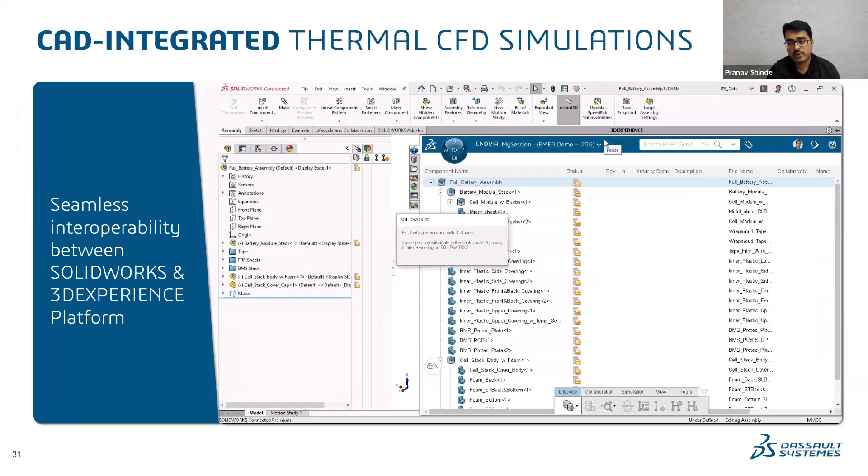That's good, it's very good to hear, like the previous example you were giving us about the aerodynamics, compared to this one, they're both fluid problems. The first one is interesting to know how it's an external one where the wind is flowing at you and you want to understand the science behind it. And in this one, you've got the fluid, the hot air, flowing within your model. So yeah, we can address both, and of course use cloud computing to take advantage of some local, some cloud resources to fasten your simulation and go work on some other things.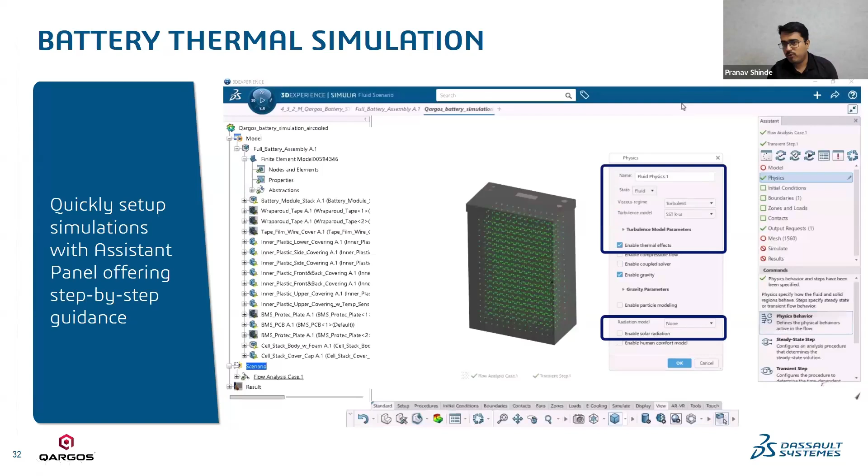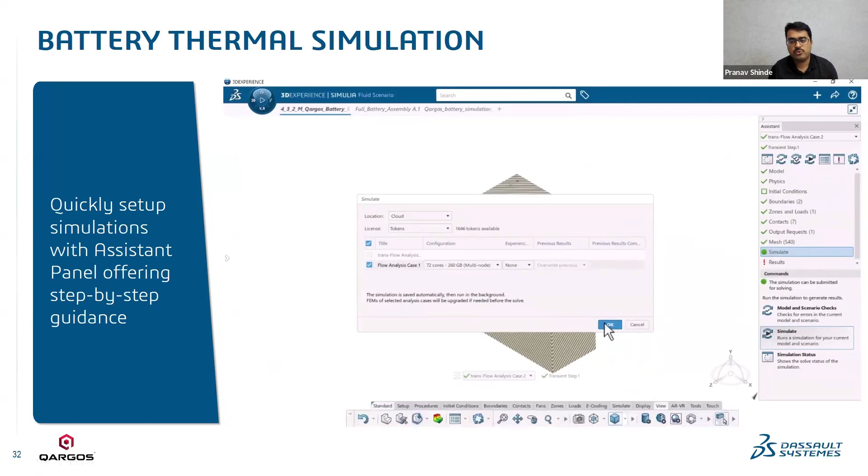Yes, yes. And one of the best things about this particular FMK solver that I like is the assistant panel. It's one particular thing that shortens down the learning curve for new engineers. You have all the things at your hand. You can see at which point you are not completed, and the things you complete, you get a check directly, so you need not worry about it. Then you can solve it from here on the cloud. As I said, you just push it, solve it, and forget it. You get the results when you come back a day or later. This is the most beautiful thing I love about it. The system is free for you to do any other things.

And what blew my mind was these are very complex and large models, right? Here we are looking at mesh counts anywhere between 30 to 50 million volume elements. The fact that you're able to run this on cloud, get a result overnight, and explore several cases, that's quite impressive.

Yeah, I mean ideally we should only have been doing load case 1, 2, and 3. We didn't have to do for ambient temperature 40 degrees Celsius and above. But then the engineer thought, let's push it for 40 degrees Celsius, let's see how the battery is behaving at higher ambient temperatures also. So we added case number 4, 5, 6, and then pushed it to cloud.

So ambient temperature is the temperature outside the vehicle, outside the battery pack on a particular day. Yes, yes, yes. So it could go worst as a high scenario would be like a very hot day with a very high current being applied over a long period of time. Yes, yes, right.

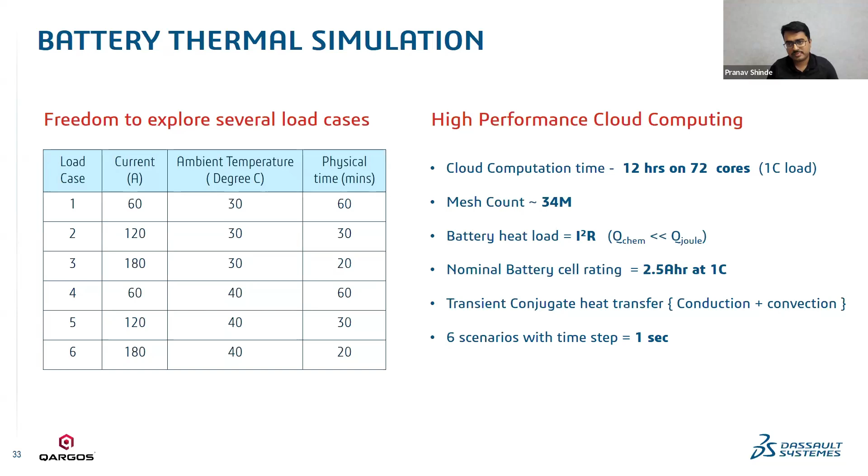So tell us about the importance of accuracy in the battery production workflow.

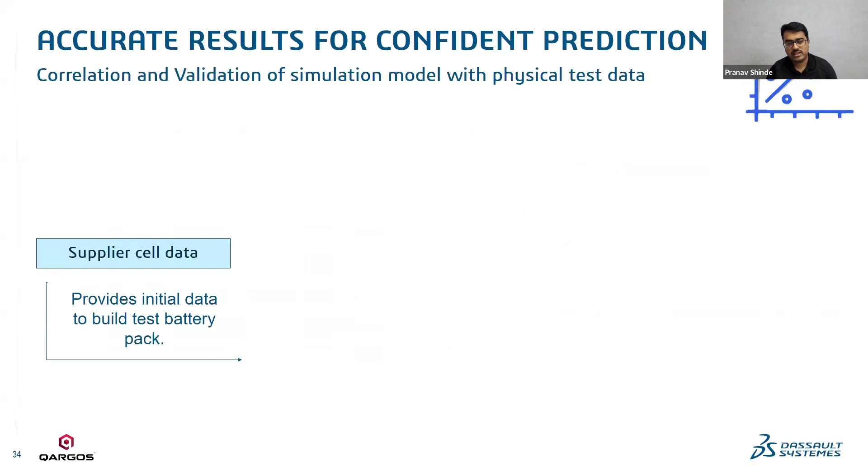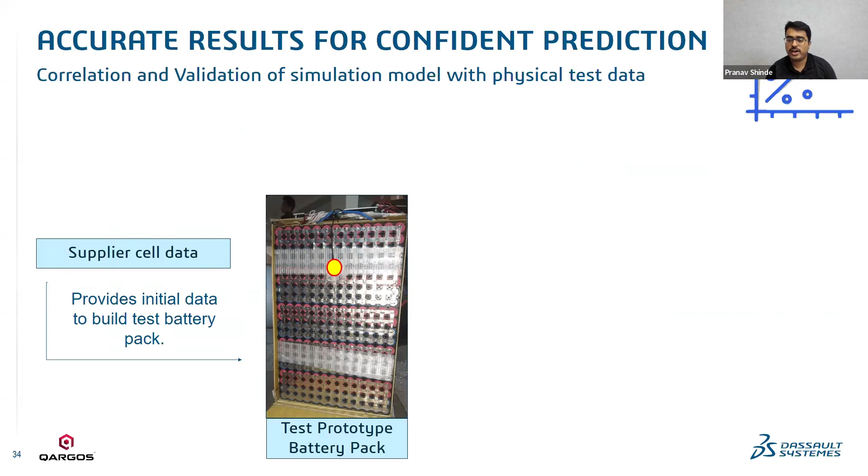When we talk about battery simulations, it is very important to have good confidence on the results you're going to get, because if you trust them blindly and go build the battery packs and it blows into a fireball, it's going to be very tough to control that thing.

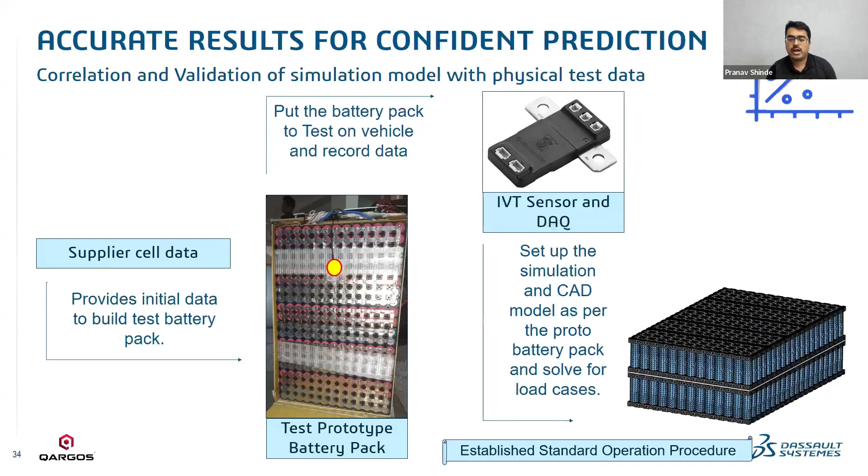So we did a lot of correlation studies with the simulation software. We built a small test battery pack. We put a sensor onto it, equipped it with IVT sensors and DAQ systems, and then set up the simulations to try to understand how much temperature correlation is happening.

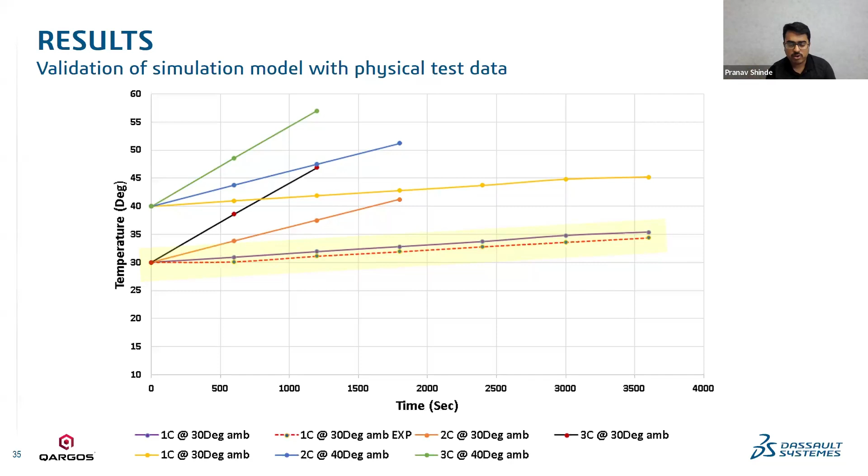But it's pinpoint, and this gives us a lot of confidence to go ahead and do the simulations on the cloud platform, and then be confident on the design and go build the battery packs out there.

We have one minute left, so maybe we can wrap up real quick. Can you share a few conclusions from your battery studies?

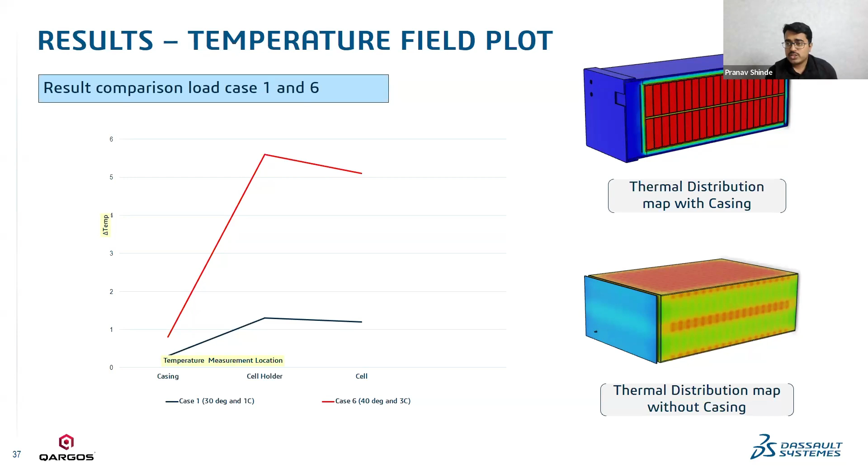This indicates that the heat distribution is not uniform across the bill of materials, so something has to be done to bring it to common. This is where we thought of going to a liquid cooled battery pack, because this was an air cooled battery pack, where the air was not able to transfer heat from one component to another effectively. That was one of the conclusions from this particular study.

So the next battery pack we are going to build is a liquid cooled battery pack, which will ensure proper thermal transfer across all the bill of materials. The conclusion was the delta T accumulation was very high, almost 17 degrees Celsius, which proved a risk of thermal runaway, along with the heat distribution issue I talked about.

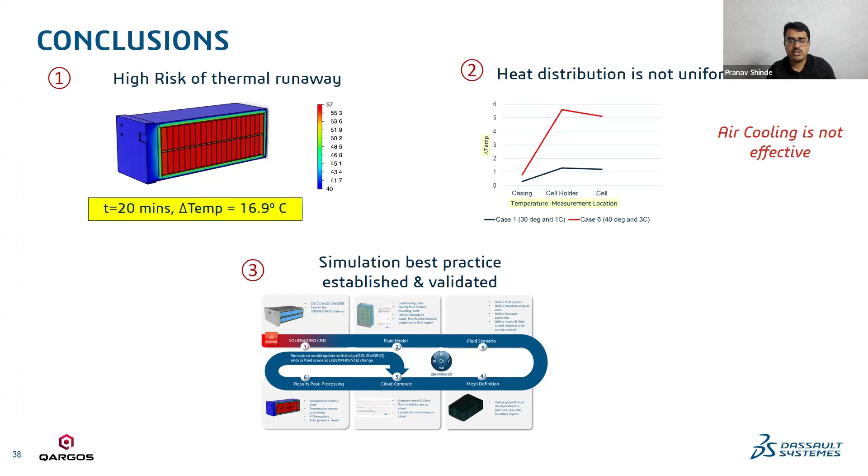The most important part was that we established a best practice to do the simulations, and it was validated with our bench test setup. So now we are completely free of the intensive process that goes into simulation. We can change something, run it on the cloud, and get the results quickly.

This is just fantastic stuff. We can do a lot of variants in battery packing henceforth. Once you have the design on the cloud and the simulation set up, then you just iterate on the cloud, making one iteration after another.

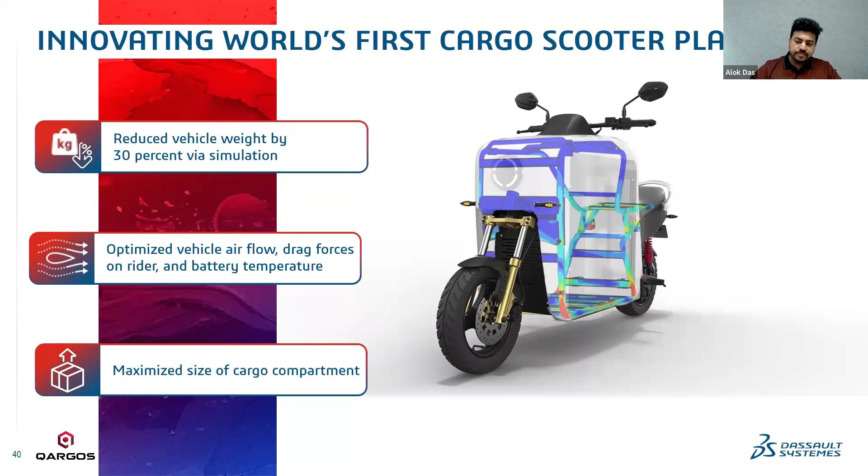Thank you, Alok. That brings us to a perfect segue into the next topic. I know we are running over time, but maybe we can wrap up real quick. Can you quickly talk about what the slide calls future work, but this is already present? Future is now.

The present now. So the team is already working on the liquid cooled battery design, the battery drop test, plastic cell holder manufacturability, and EMI EMC. All four of them we are working on.

Wind tunnel testing and validation - already the aerodynamic study has been done, and the workflow and process has been set. The objective is to validate as we progress further in the year, when we'll be doing the actual wind tunnel testing. But a lot of these areas, except one, we are already working on, and we're developing the workflows for that.

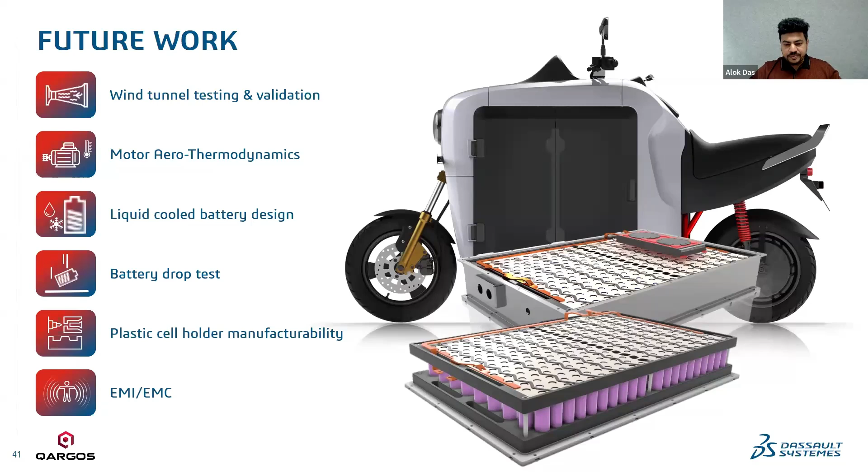This is absolutely great. I had a great time hearing these insights and what actually goes into the minds of these bright minds who are bringing out such fantastic products. Thank you so much for taking time to share this knowledge with us and our viewers. I'll definitely go back and look at this presentation to get some deeper points, and I might be pinging you guys on LinkedIn with some more questions.

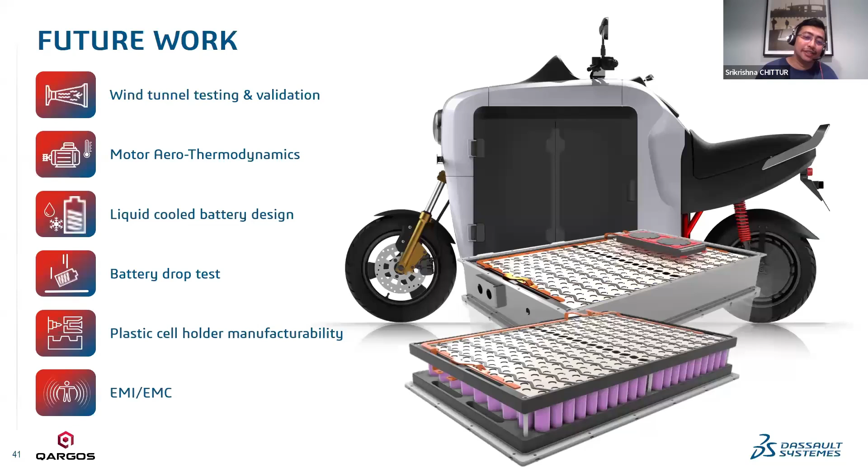Yes, I do. I want to bring up a very interesting story, especially for students just entering the professional world, or junior engineers just starting their journey with SolidWorks as their design companion. For those who don't know, Pranav actually participated in Formula SAE 2013 in Lincoln, Nebraska, as a student using SolidWorks. Fast forward 11 years, he was on the main stage of 3D Experience World along with Alok, releasing this world's first compact logistics vehicle, completely innovated with 3D Experience Works. Now he's the lead vehicle integration engineer - this is an amazing success story.

So, Pranav, tell us about the transformation you've seen in the last 10 years in terms of your personal career growth, as well as going from the traditional SolidWorks desktop to the 3D Experience platform.

Yeah, definitely, and the journey is very fascinating. I didn't even believe at that point of time that I would be developing something like the QARGOS F9 platform, which is first in the world, and showcase it on the SolidWorks platform, the 3D Experience platform. I would have never believed it. But the software has evolved a lot from that point to today. At that time, my role was mostly designing the vehicle, but today it's much more - it's collaborating with multiple teams, doing the ECN process, having program management, and all these things today are being provided by the platform to me. So it makes my life much easier today to build something like this.